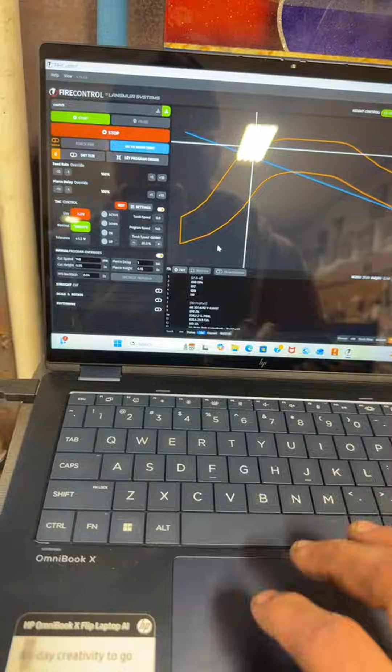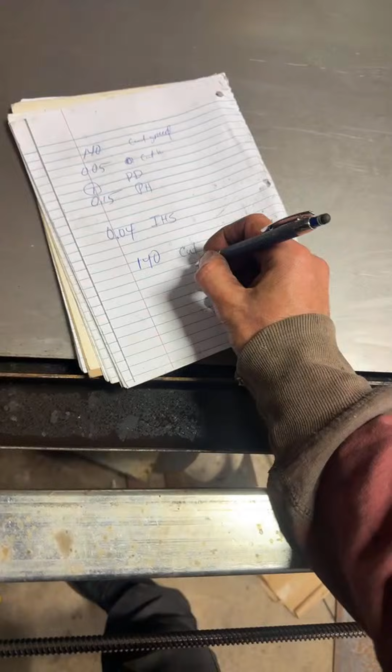Okay, right there, that's what I did wrong. It's 1 second. That's what I did wrong. So it is 140 - let's do this over. That's what I did wrong. 140 is the cut speed. The cut height is 0.05. Pierce delay is 1. Pierce height is 0.15. And the backlash is 0.04. All right, now let's just redo this.

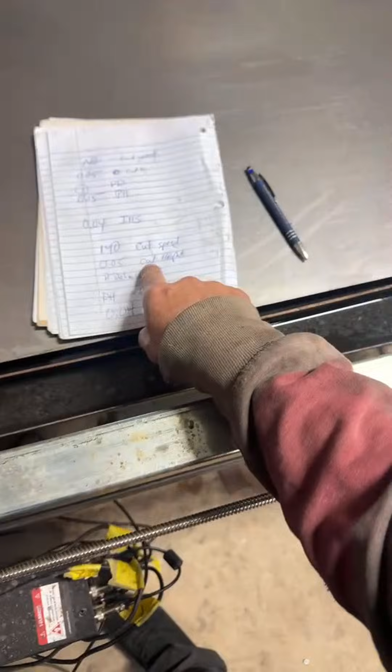All right, now let's change all them parameters. So the parameters is cut speed is 140, cut height is 0.05, pierce delay is 1 second, and the pierce height is 15, and the backlash is 4. All right, let's see if that fixed it. We're cooking with gas now.

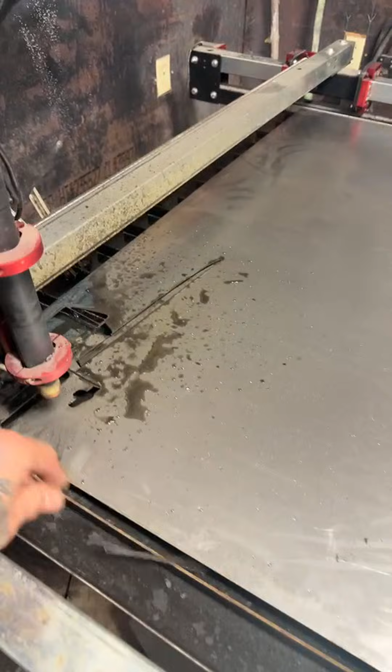Hey Mac, I might want to increase this drawing like 5%. It's got so much fine detail in it that I might want to increase it by like 5%. Right now it's 11.5 by 24 inches, but it's got so much small detail in it, I don't know if it's going to come out good. We're going to find out though.

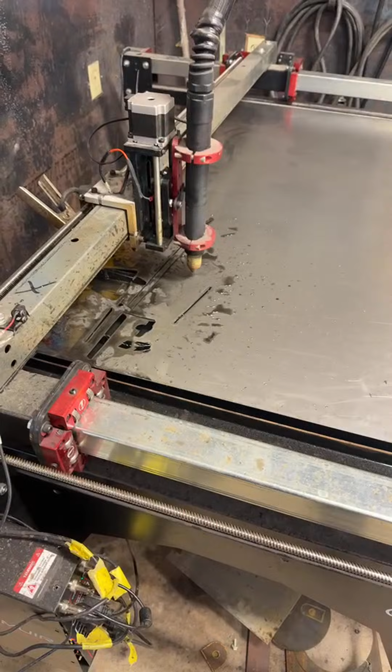All right, sorry Mac. Yeah, I think I'm going to increase it. We'll just let this one finish.

This is the first piece that I've cut with all these intricate little cuts in it. So...

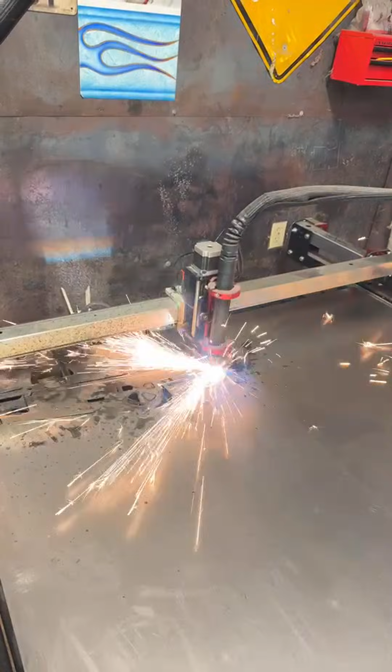I got you, Mac. I got you on the big screen. Yeah, I need to blow it up.

It's got so many small details. The torch is losing its way.

It's a daggone commercial, Mac. You got a commercial on your Premiere. Yeah, that's what it is.

It's got so much small detail. The torch is losing its way. Look.

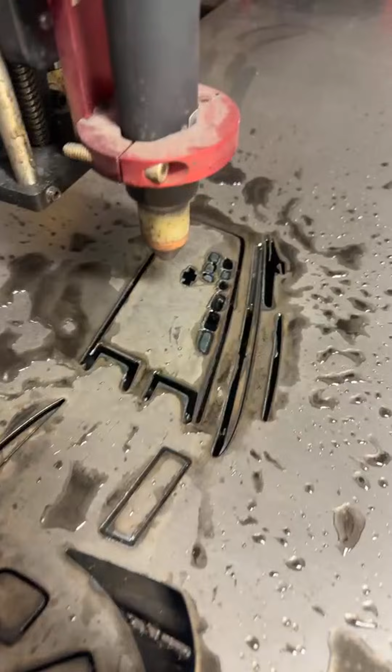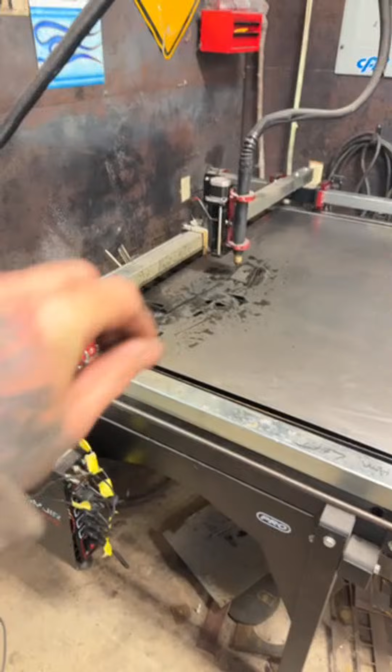I need to blow it up. I'm gonna let it finish just to see what it looks like. But I need to increase it, you know, a little bit. Yeah, right there it is.

There you are, Mac. What's up, Elko? Oh yeah, you're the only one here, Mac. I done pissed everybody off.

Y'all figured out what it is yet? I'm learning. Yeah, it's just way too much small detail.

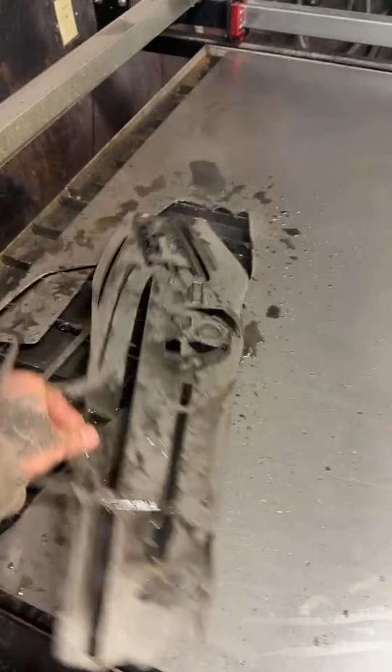What do you think about that? It's not too bad for the first time cutting out something intricate. Hey, I'm all right, I'm happy with it.

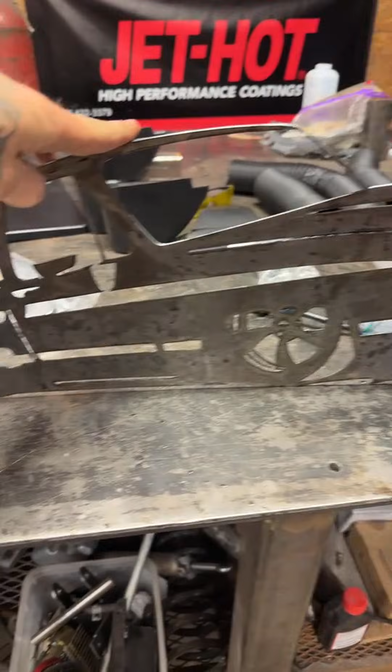I know, I mean it's not perfect, but I can fix that. I can fix it, I can blow it up. See, it's just too small detail right there, but if I increase that, and I lost the mirror. So I lost the mirror.

Here, let me see if I can. Let me see if I can put it right there. I can probably stand it up. I can stand it up right here.

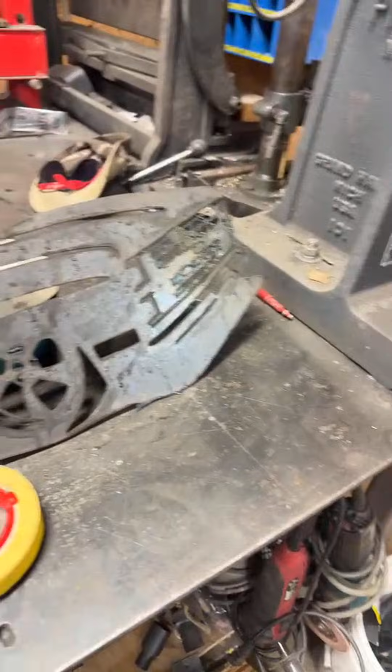Yeah, it's all right, it's fine. Yeah, I mean, it did good. I'm happy with it. I mean, honestly, hold on, let me do something right quick.

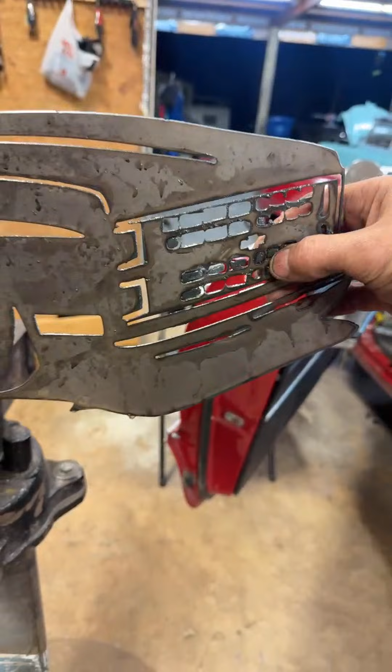I mean, let's be honest, I lost a little bit. I lost the mirror, I lost the grill. Because you see, it's just too tight, too small. So I don't want to cut another one out because I don't want to waste more material, this shit's high. But if I cut one out, I could increase it.

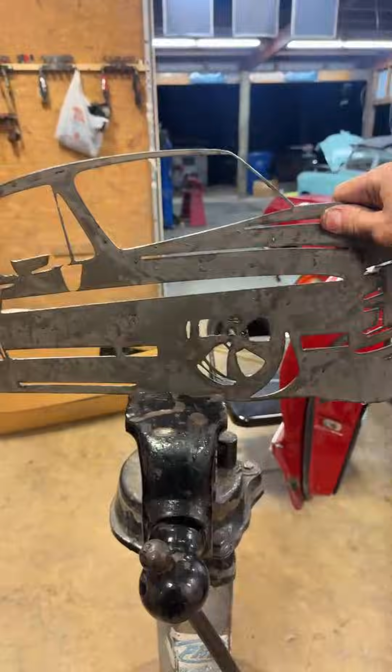Well, actually, it's supposed to be like, hold on. There we go, that's better. If I could create... I appreciate that, Elko, Chris.

So, yeah, I got Mac up there on the big screen. So I could increase it by, I don't know, 5%. So it's actually 11 and a half this way and 2 foot this way. So if I increased it a couple inches this way and a couple inches this way, it should make all this stuff larger.

Yeah, it would, I mean, if it was cut out better. Like I said, it's just too... see, it blowed out right there. But hey, I'm learning.

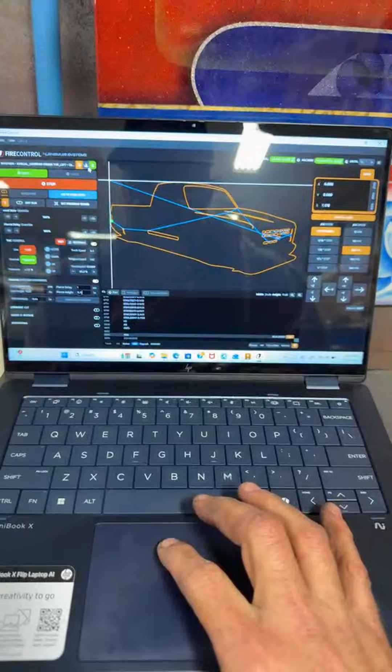Let's go over here and just see. I mean, I'm not gonna cut one out, but let's just see. Let's go right here and pull it up. So right there is the file.

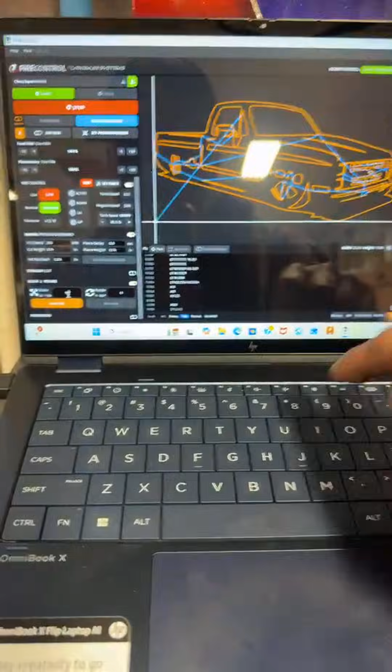So right down here it says scale and pattern. So right here it says, what if it says, all right, so right now it's 24.6 by 11.8. So let's go... holy shit, that went 243 by there.

Okay, we can't go that much. So I thought it was 10%. So let's change this. All right, so let's just go 1, let's see how much it goes. All right, no, so they can't do it.

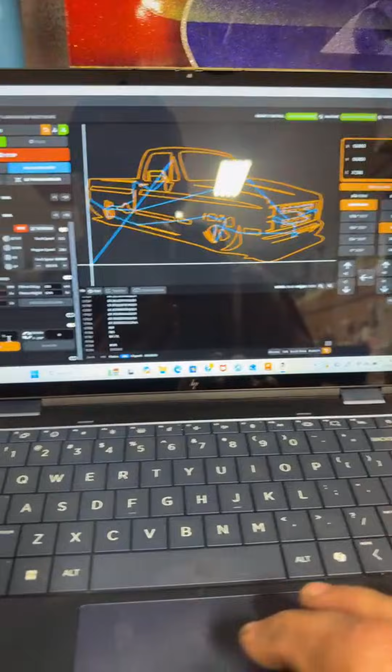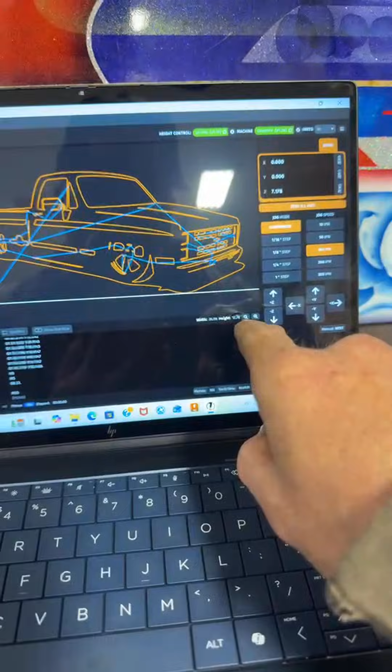So let's scale it by 2. Now, if we scale it by 2, okay, 2 times that. So 1 would be that. So let's go 1.5, I see how that works now. So 1.5 times that, that would probably be 3 foot long by 18 inches tall. All right, so 1.5 is that, okay, I see how it works now.

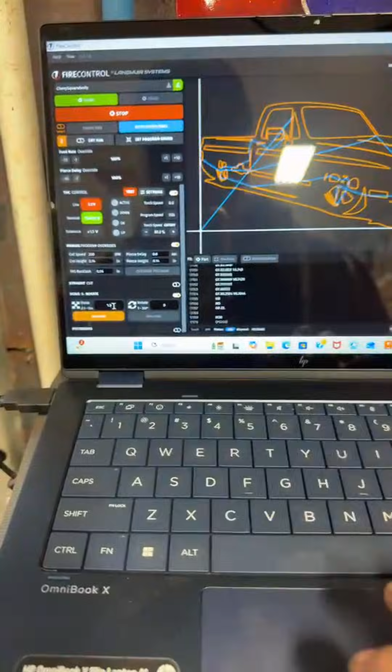I got you, I see you. All right, let's go back. So let's go 1.25, generate. So that's 15 by 30. So we increased it by 2 inches, we made it 2 inches taller, and because it was 24.6 inches, we made it 2 inches taller and 6 inches longer.

All right, look, we got to cut out 87, but it's a little bit too small. Look at our 87, that right there is 11.5 by 2 foot, and it's actually too small because it's not really detailed right there.

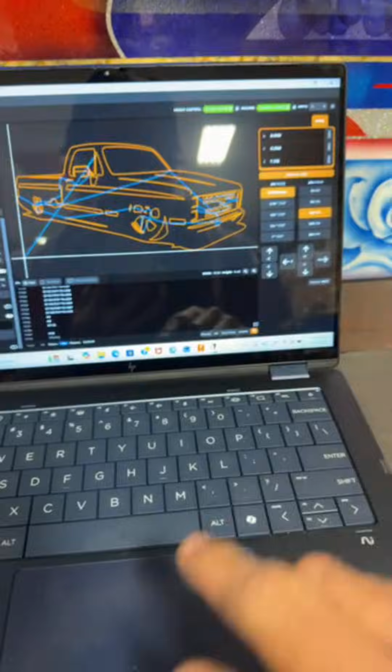So what we did with 87 is we increased the size. So this thing, I can scale it up. Right now, the one we cut out was 12 inches tall by 2 foot this way, so it lost a lot of detail. So what I did is I increased it by 1.25, and that made it 30 by 15. That's 3 inches taller, and 5 inches wider.

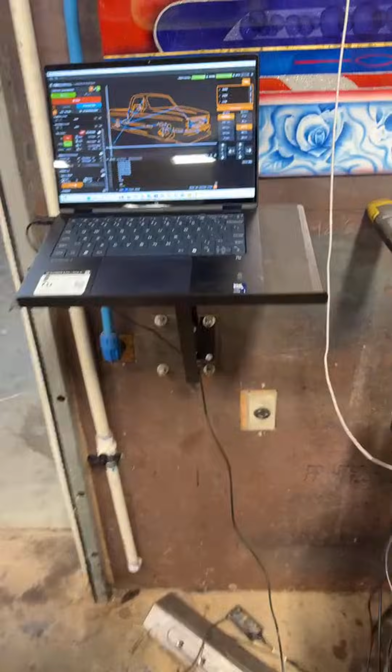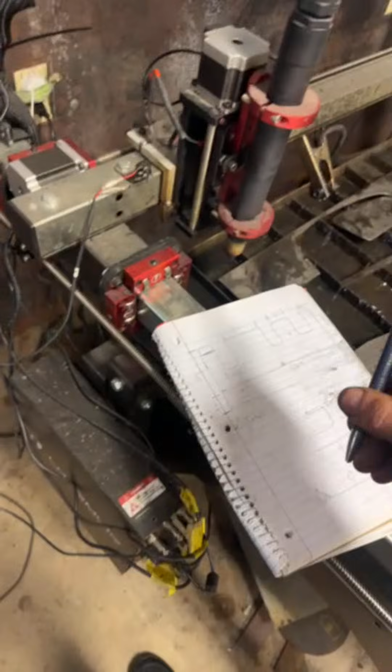Well hell, let's just see something right quick. Hold on, let's see something, 87. Let's write that down so I don't lose my numbers. At 1.25, that is 31 inches times 15 inches. All right, let's see what it is.

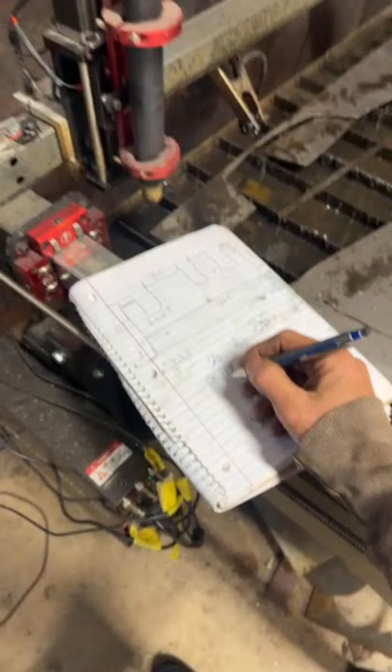All right, let's see this. Let's go to square body, let's do it again. Let's pull this up, we got it right there. Let's go 1.3, let's see what it does on 1.3, generate. All right, so it made it 32 by 15, it increased it by 1 inch, made it 1 inch wider and a half inch higher.

So we got that. All right, hold on. 80, Mac, I got to turn you down. I'm still watching, 87. Let me ask you a question, 87: how big is too big?

Okay, how big is too big? Right now, I want it to have the detail in it. Right now, the one we just cut, this one right here, it has the detail, but it don't look good. It's not presentable to be shared out. The reason why I'm saying that is I lost some details in the wheel, I lost a mirror, and I lost a grill, and I lost the headlights.

So this one right here is 11.5 inches this way, and it's 2 foot this way, right? So that's that. So my question is to you, 87, I'm going to make it a little bit larger because this right here, it's okay, but I lost a lot of detail. So we need to increase it.

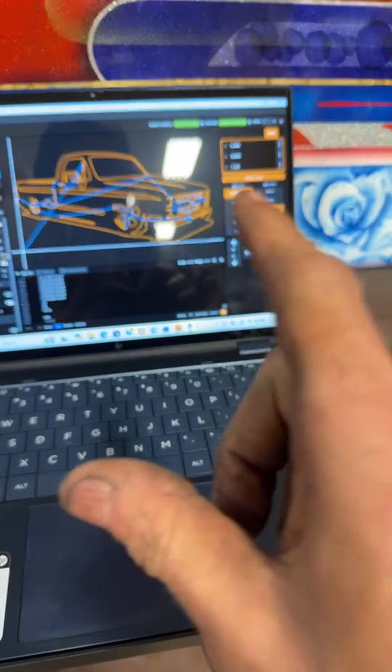So if I increase it by 1.3, that makes it 32 by almost 15. So let's do this right here. We're going to do this, let's just redo the file, pull it up, and let's go.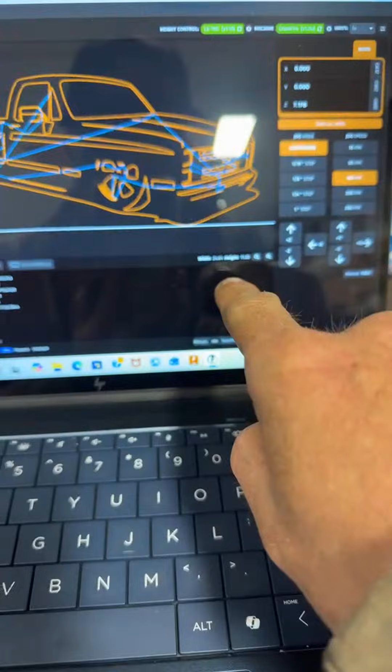So right now the original cut is 24, just say 25 by 12. So let's go 1.4 and see where that takes us. That's 36. That's 36 by 16.

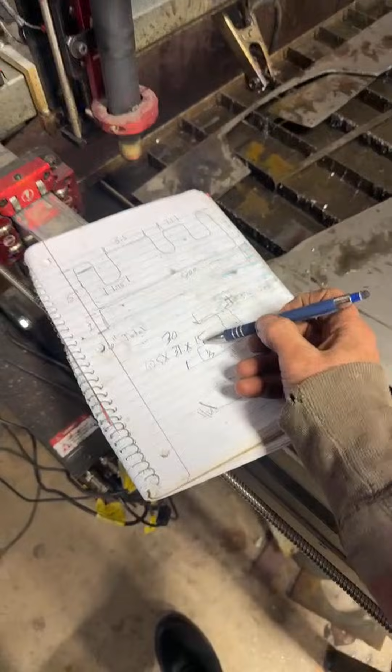No, I'm not going to throw this one away, but if I make one, I'm not going to throw that away, I'm going to keep it. But what I'm saying, if I make another one to sell, I'm asking you, if you had one on your wall, is 35 by 16 too big? I think if it's a little bit larger, at least 15 inches tall, I think it will increase the grill and I won't lose the mirror. See the mirror, I lost the mirror a while ago. So basically it'd be 34 and a half, it'd be 35. So if I cut that one out, it's gonna be 35.

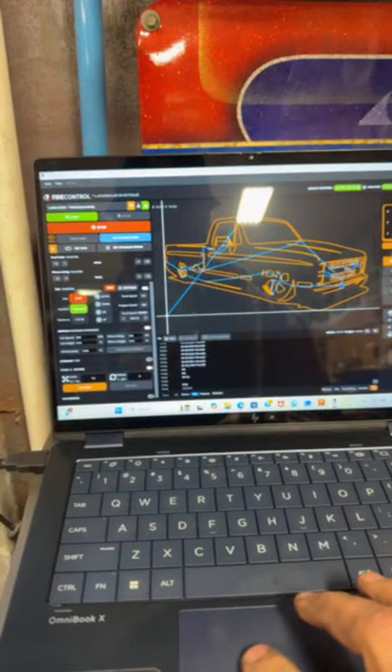That's pretty damn big. How big is this piece right here that I made? That's 32, let's see if we can get it 32. Because that right there, that's 32 inches. What is that? That's 32 by 12. Let's see, let's just do something. Hell, let's just do it, piss on it. All right, so let's go. So that's the original size, 25 by 12.

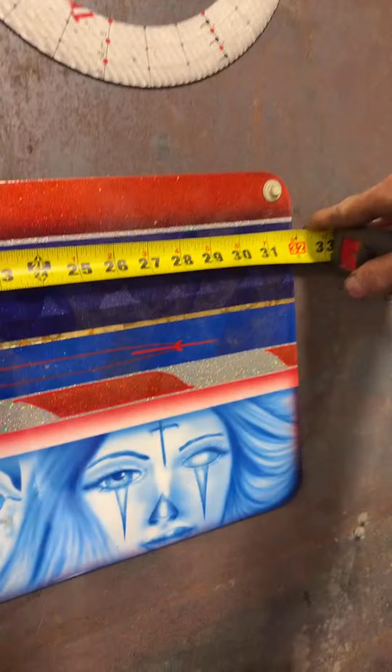So let's go, 1.3 was what? Let's go 1.3. 1.3 is 32 by 15. And what was this? 32, that's 32. Let's do that right there, that's 32 by 15, and let's just see what it does.

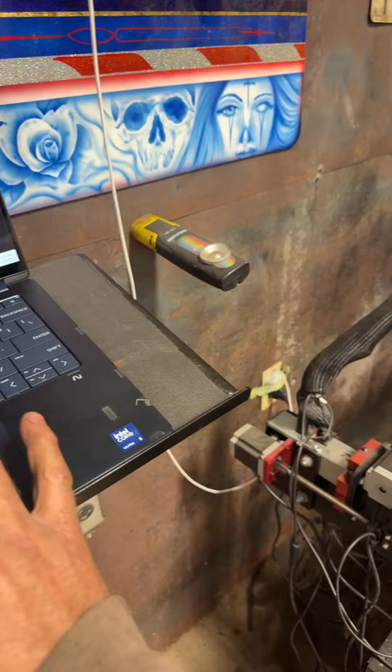Yeah, I know it's metal, but this shit right there is $200, $215 a sheet. Yeah man, it's $200 a piece for a 4x8 sheet of 18 gauge. It's $200 and some dollars, man. Yeah, this shit ain't cheap, man. Hell no, it ain't cheap. And I got to drive an hour to go get it because I can't get this metal close.

Mike, we cut this out, but I lost a lot of detail right here. This is 12 by 24. I lost a lot of detail right there. So we increased it by 1.3, and now it's 32 by 15.

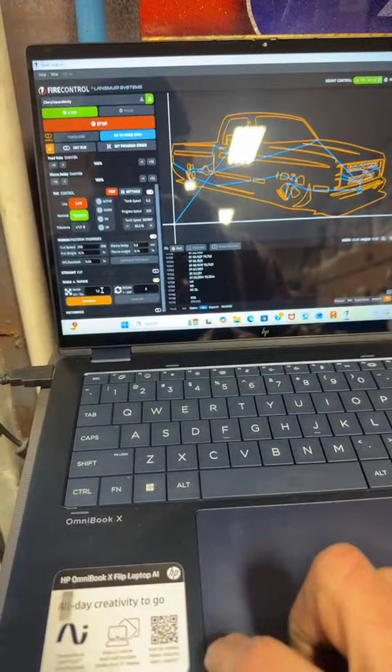I ain't hoping no more, we're gonna do something, let's hit it. Let's see something, let's go 1.4 and see what it does. 1.35, let's see what it does. That's 33 by 16.

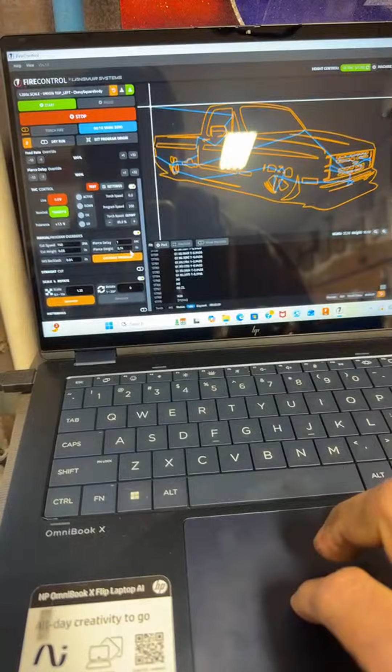Set program origins. All right, now we got to put the parameters back in there. So we got to go 140, and then the pierce delay is 1 second. And then cut height is 0.05. Pierce height is 15. And then the backlash is 4. And we're going to regenerate that. Yes, we're going to override the program.

Can you change this cut sequence? No, I can't. No, I could redraw it and take out the whole grill and just take the whole grill out. Let's cut this and see what it looks like, see if we lose anything. Let's just do it, let go.

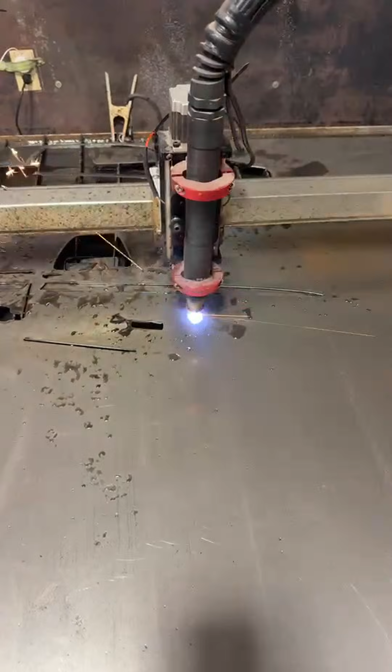You ain't gonna learn sitting on the couch. You know what I mean? You ain't gonna learn on the couch.

The real test is gonna be on the grill. That's gonna be the real test.

Now I could take some of the detail out.

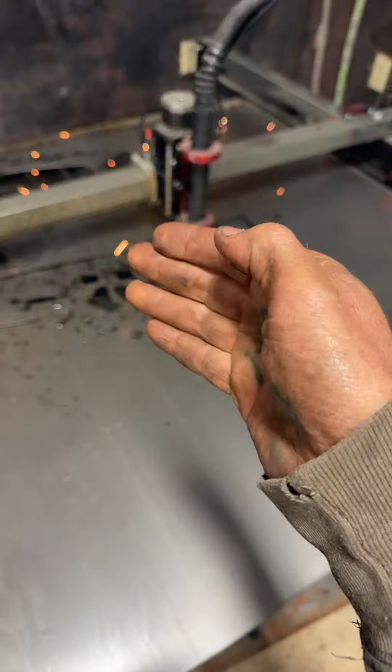Probably so. No, it'd probably be the same. It's the size of the hole, Mac. It's the size of the hole. It's not the cut. I mean, if the plasma runs over it and cuts a hole and then runs right back over it, then it don't have no issue. This is gonna be the test right here.

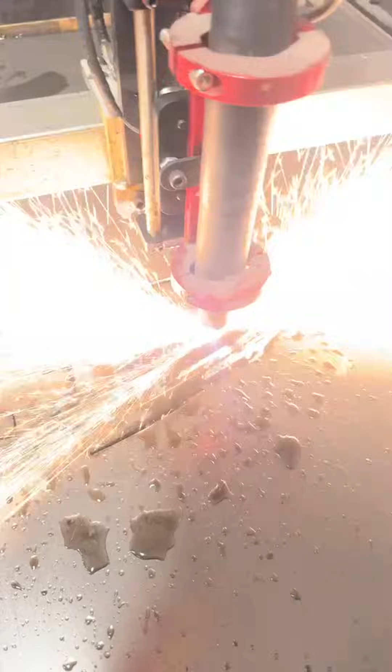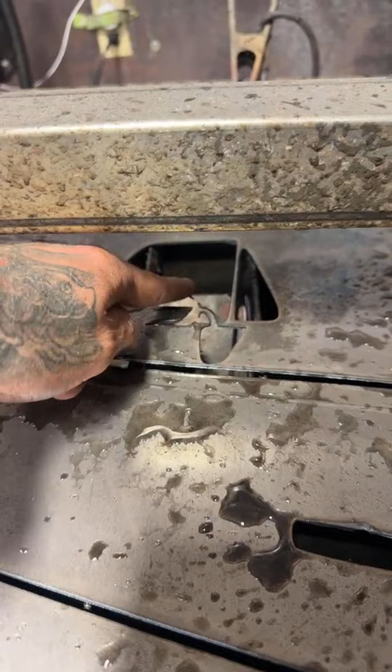It is so close. It looks like it's doing better. Because the distance of it is so close. The distance of it is so close. You see right there where the flame edge cuts the top of the mirror off.

It cut the damn bow tie out though, didn't it? Yeah. I mean, it's doing better than it was.

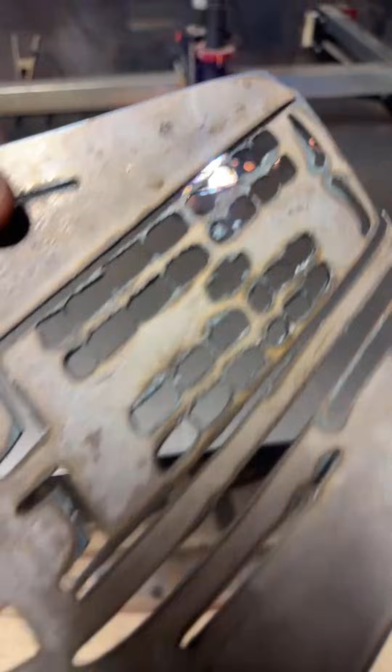Like I said, this is the first intricate piece with all these little designs, which it has a lot that I've cut out. I mean, there's the first one. You see the first one, it just cut it out. Just too much, and then lost the mirror altogether.

So we increased it by 1.35, and it's doing better.

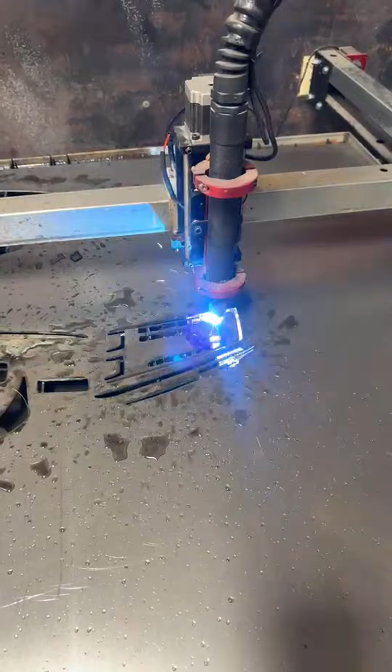And probably once you clean it up and sand it down and hang it on the wall, I guess it really wouldn't matter. I mean, if it was on the wall up there, it wouldn't really matter, you know?

Yeah, you can still see it. 87, you still in here?

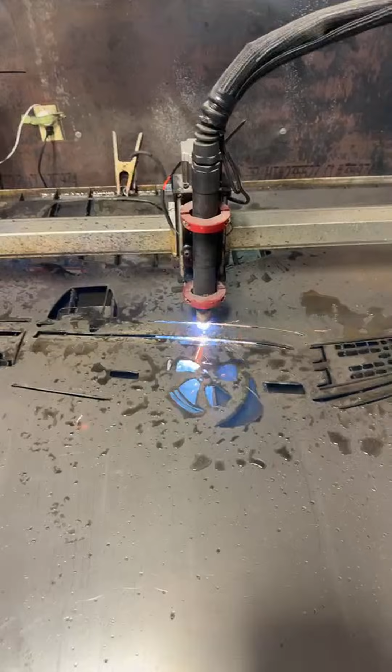Okay, it's just about done. We're gonna see what it looks like when it gets done. It's not too big.

I mean, you see where it messed the mirror up. But I mean, you could cut that tab off and you just wouldn't have the top arch of the mirror.

Hey, but that's how you learn, man. You see what don't work and you change it. And then you see what works and then you change it. And you keep just overcoming each obstacle every day until you get to where you want to get. And then you just keep moving.

You know, there's a lot of people that's in the same place right now they were last year. You know, and it's sad. It really is. It's sad that people are in the exact same place they were last year, but they want to...

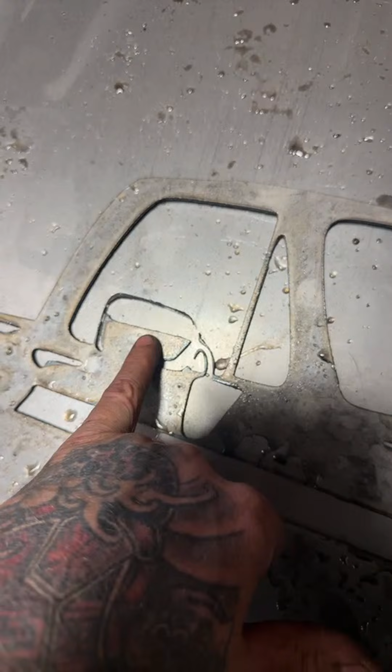I mean, let me see if we can.

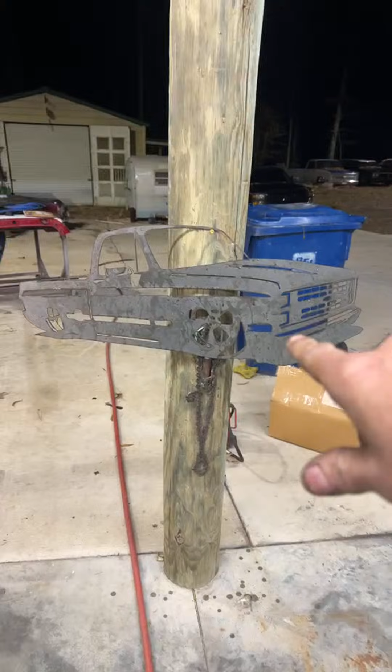I mean, you think about it, if you cleaned it up and you primed it and you painted it and hung it up on the wall, I mean, you think about it, once you cleaned it and hung it up on the wall, I mean, you wouldn't...

Let's see something. Look at the granddad. Look, granddaddies. 1, 2, 3, 4, 5, 6.

You talking about turn down the voltage? Mike, you talking about turning down the voltage? It's supposed to be automatic with that black box. Whatever you tell it, like cut an 18 gauge, it's supposed to regulate. But I mean, I can try that too. What do you think, 87?

Let's see, we can set it right here. There we go. What do you think about that?

I mean, if you cleaned it up and sanded it up, and then primed it and painted it, whatever color you wanted, and hung it up on the wall, you wouldn't be right up on it and see all the detail that's not really there. You know what I mean?

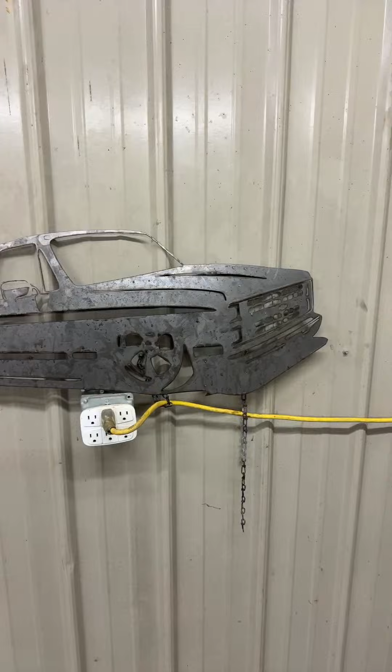So I'll take the cutoff wheel and cut that where it messed that up, and then clean that up, and cut that off where it was too much. I'll snip that and snip that, and then I'll sand it down, and then we'll see what it looks like. Probably have to do it with a DA - probably can't do it with anything heavier than a DA, because if you catch anything, see that right there is not attached on that thing right there.

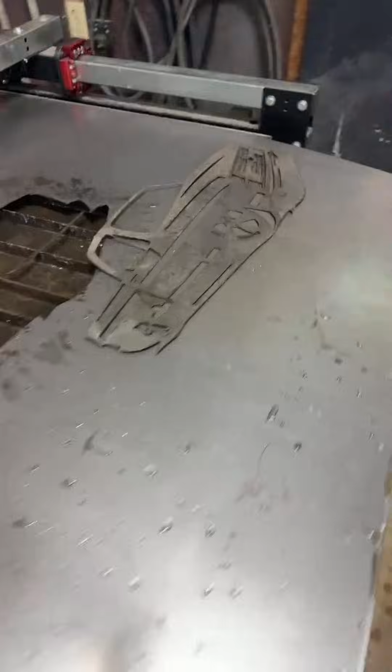87, what's up, Tulu? It turned out all right. For my second cut, I think it's okay. We did one before, Tulu, but it didn't come out right. Right there, it didn't come out too good. But this one right here, we increased the size a little bit. I mean, yeah, it's a square body.

Oh yeah, so if you take the other one and put the other one like right there, it looked like somebody parking.

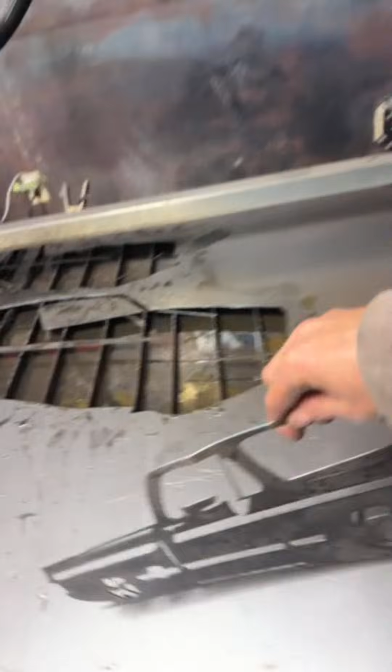Oh, I bet it is. Where are you at, Shooter? I guess Chief had dropped off. Oh, there he is, 87. 87, will that work? That work for you?

Well, go out here and put it next to the wall so you can see it out here. I'll put something behind it so you can see it. Let's set it right here on the wall.

I mean, we lost the mirror right there, but I'm going to take the cutoff wheel and cut that, so you just lose that piece there, and then we'll cut that off, and just clean it up and sand it down and paint it. And once I knock the slag and stuff off, it'll turn out pretty good.

But that right there is 32 inches that way and 15 or 16 inches that way. So, 87, does that work for you? Is that a good size for you?

Oh, Nebraska. I think that did all right. Did all right for my second cut. Second cut. Yeah.

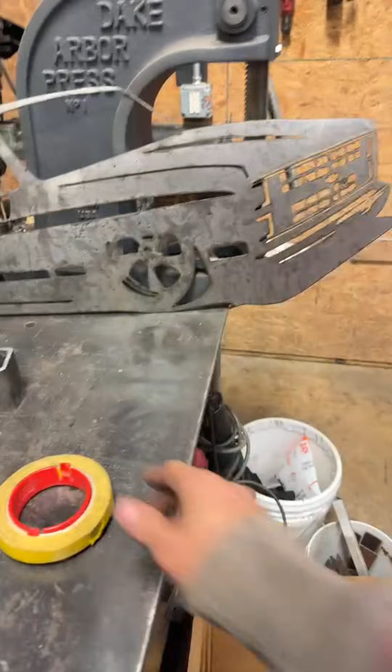If that sounds like a plan to you, text me your address. I think I got it in my phone already, but just to double check, send me your address and I'll mail it to you. I'll get it cleaned up and shipped to you next week.

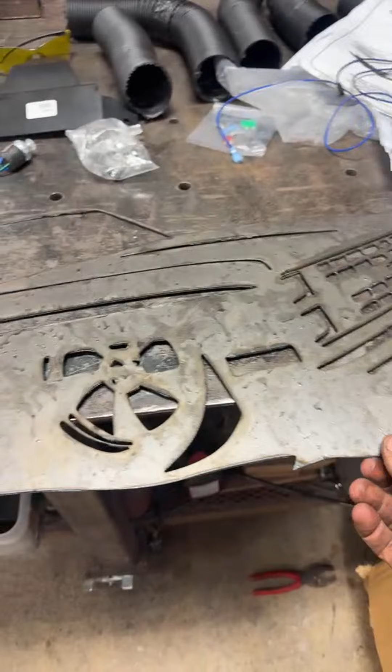I got some stainless, and I got some aluminum, Mac. I sure do. I got some stainless and some aluminum. And we'll see how it does.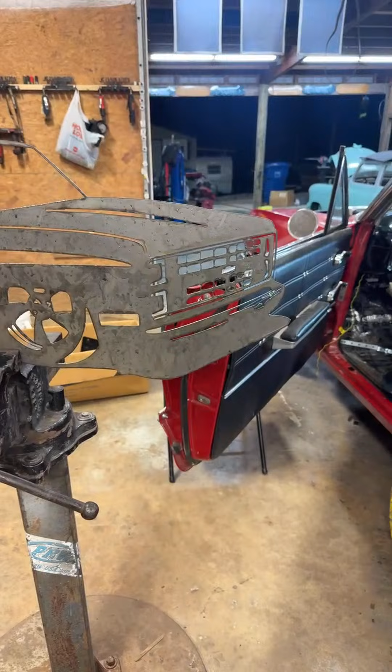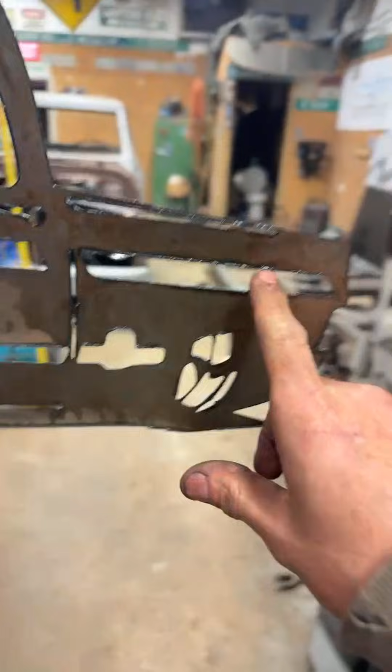Yeah, I got you, man. Just text me your address and I'll get it cleaned up. Like I said, I'll get all the slag cleaned off of it, trim this up, and then I'll DA it with some 120 grit to get it all cleaned up. Then I'll take that cardboard box and cut it up, lay a piece of cardboard down, put another piece on it, tape the ends up, and mail it to you.

Holly, get your big fat donkey ass out of here.

So you will get the very first one, the very first ornamental. And there's going to be a lot more of this stuff, man. I'm trying. Oh yeah, and we're going to get back on this thing too.

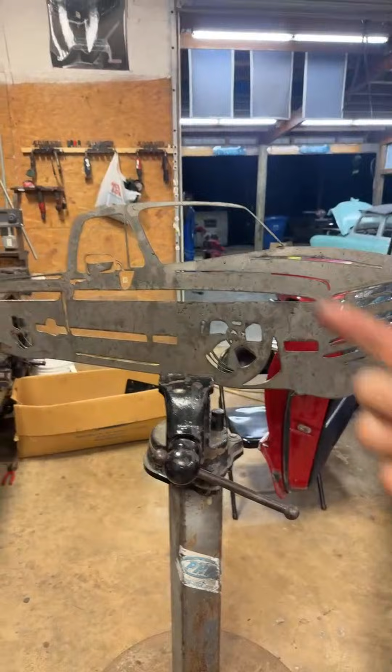No, that cat's name is Hollywood. Big fat donkey ass, where's he at? Hollywood, there's Hawkins, Hawky, Holly. Hollywood, come here, kitty. Look at him, let me show you something about this son of a bitch. Look at this motherfucker. Look at this cat. Huh, look at this son of a gun. Goddamn walrus, look at him Holly. Look at this walrus. Look at this son of a gun right here. We can go to the party with a real mink. Hollywood, you big fat son of a... What is it, fat boy? Look at this son of a gun. No, he fluffy, he fluffy.

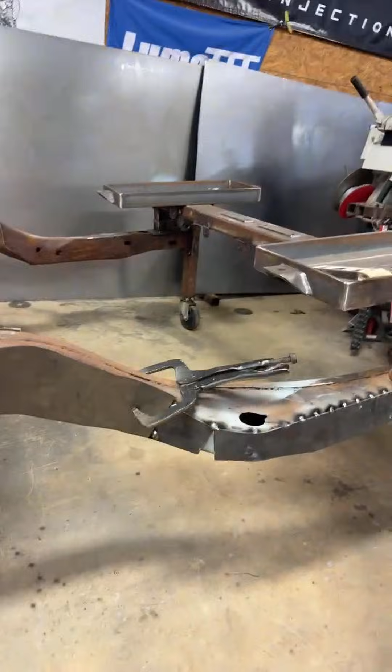So Santa Claus is bringing me some 1/8 inch plate next week. We're going to cut out, I already got somebody talking to me, they want to buy reinforcement arches, which is kind of cool. I got to get some 30 wire, and then I'm going to weld up the chassis. Taking all this stuff one day next week to get it powder coated just as soon as the powder comes in. And then we're going to go from there.

So yeah, Holly said put me down. I mean, look at him. Huh?

So that's where we're at on that. Got the engine mounts made. Like I say, got the engine mounts made. Got all that done.

And oh yeah, if you didn't know what color it was, that's the color everything's going, man.

Fluffy, yeah, yeah, what is it? What is it, you got, what did he say? He said you got big, fluffy. No, you got, how's it go? You got big, thick, fluffy, and damn! So yeah, so this is...

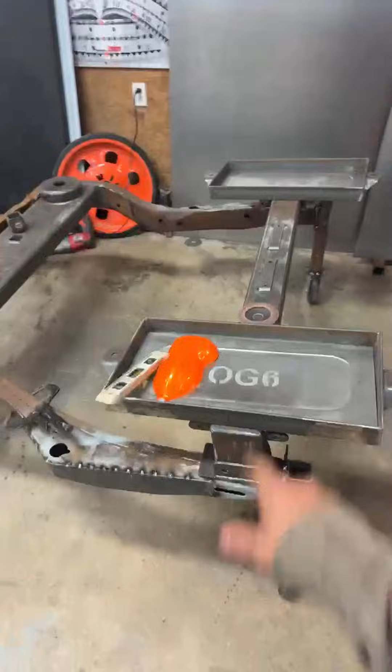That's the color. All right, boys and girls, I appreciate you.

Oh yeah, Mac, always, it's all right, it's cool. Still got you up on there on the big screen.